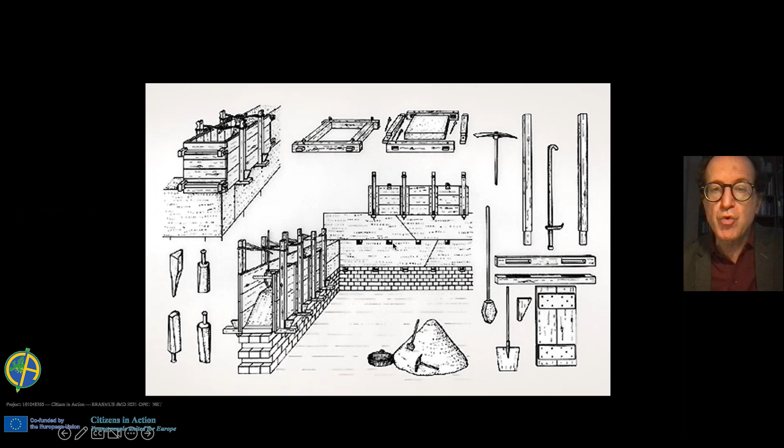These are some tools to understand how this material, which is not really compact and has not a big dimension, should be pressed or worked with specific tools to become useful for construction. And so raw earth provided in history constructions of, in some latitudes, maximum 2 floors, and we can see that the holes represent the way to build them using timber. So a small quantity of timber is complementary to this kind of construction.

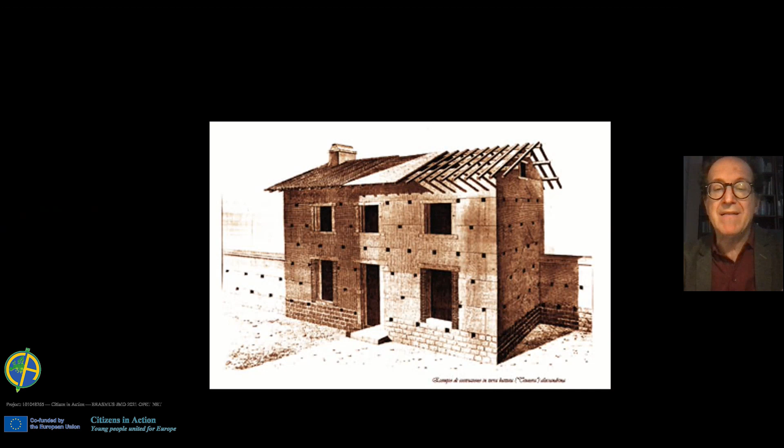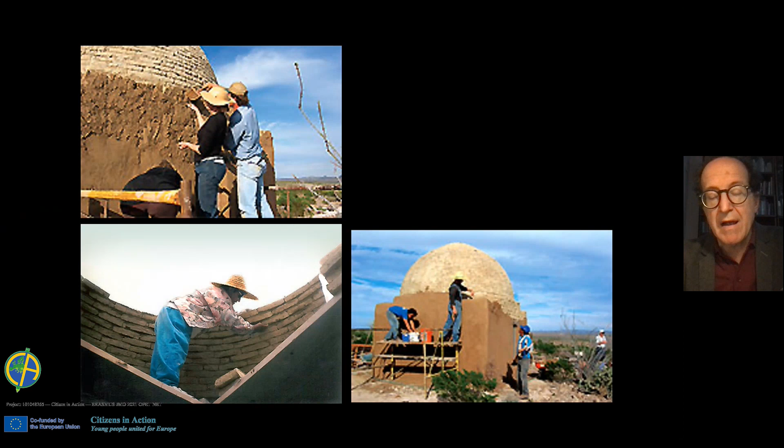So you see, the material is then plastered with the same mud, just to protect the internal structure, and this outside layer should be renewed continuously to keep the inside material protected. We see that the result is very beautiful, very fascinating in this plain vault. These shapes, very simple, are really characteristic of some areas and very beautiful.

So the capacity of improving the material during centuries made some cultures eager to organize something like cathedrals or monumental elements, and you see that the windows, the openings, which are shaped only on the high floors, on the high part of the building, for evident reasons also of defense, will include decorations which became

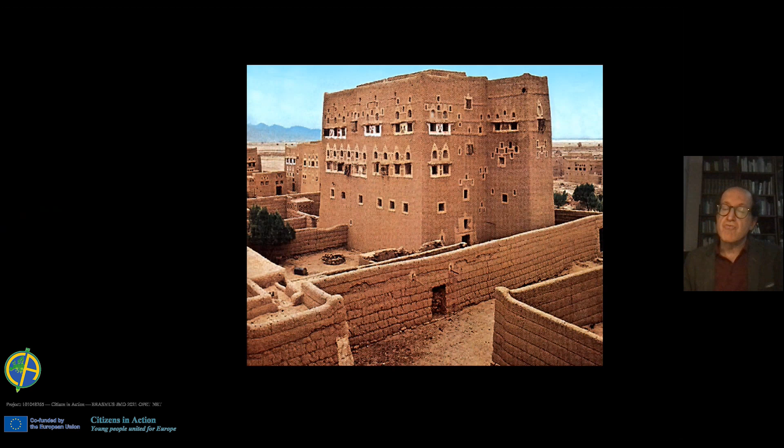symbols of these places. We can also see these are very hot climates, so this raw earth provides a very good climate inside. Also, the small openings tell us that they filter the light and can guarantee a good climate inside. This is the same thing that can explain these small roads with walls on both sides. They provide paths and connections which are not too hot, and they can help to shelter from the sun.

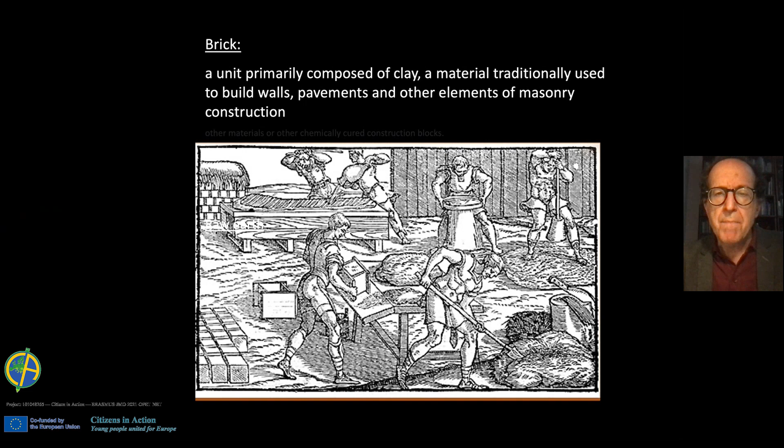Then we have bricks. Bricks are a different thing. A development of raw earth is the capacity of drying this in the sun, or cooking this with developed systems. And so we see also a plate describing how this material is shaped in modules. We see these modules and they become cubic elements, and they were used to build walls, pavements, and all the elements of the masonry construction.

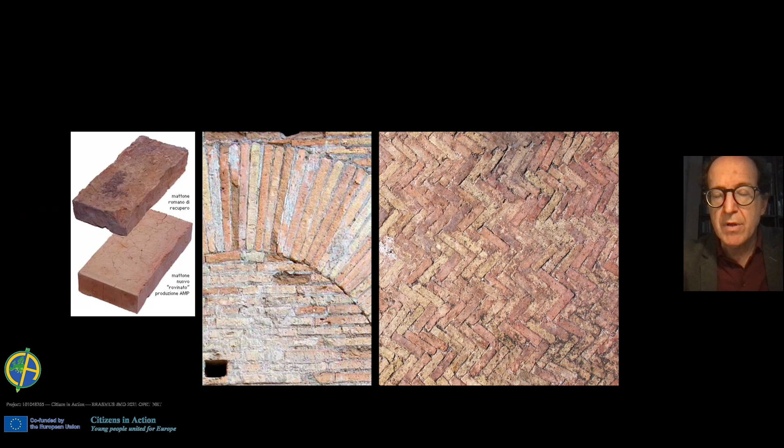In ancient Rome, they were using brick for every detail of the construction, for the masonry, for arches to provide openings. And this was a very successful material, which was also developed into decorations more and more. And so we can see the Roman brick. This is the modular element, which is very light and very easy to be used by one man with one hand. And you see different patterns. These are arches with a special thin material. And then here are pavements in the shape of fish bones.

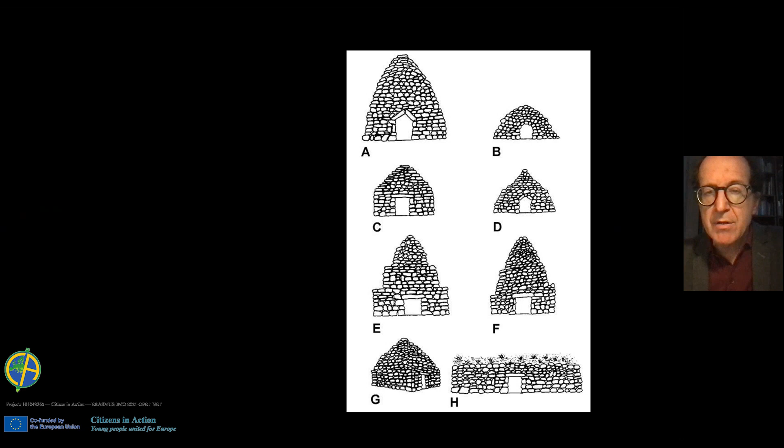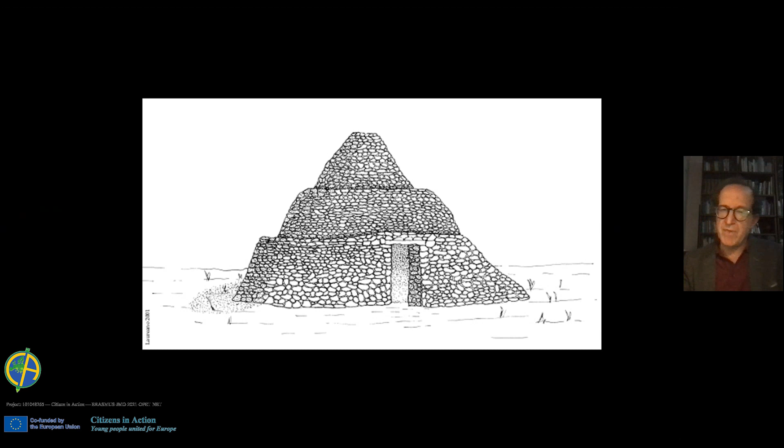One typical primitive use of this material is to provide huts, very simple houses, elements for the countryside. They were used for men and animals in agriculture or in open fields, in many lands, in many latitudes. We can see here possible different schemes according to the findings of these areas. They are the result of a growing capacity of local people to shape and use these materials, and they can become monumental elements. The walls are from 1 to 2 meters thick, so they also provide a very good climate inside. And this is one example in central Italy, which has been restored.

This use of material becomes monumental in some areas, like southern Italy, in Puglia. These trulli are traditional houses. Every conical vault of these countryside farmhouses is a room.

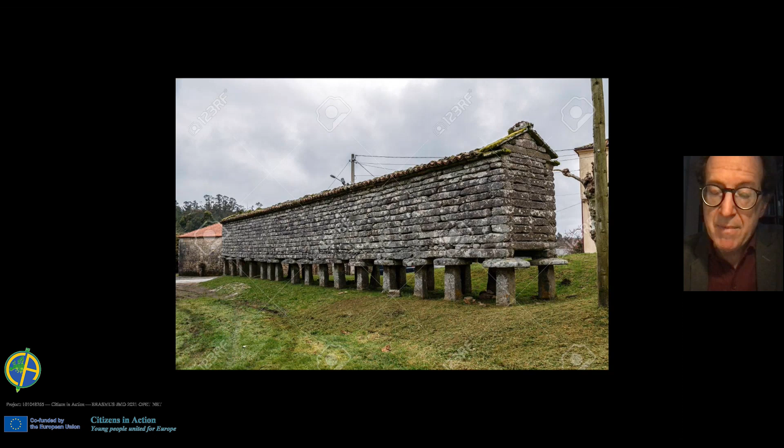So each room has this protection, which is also a monumental image that can be seen from far distance. But the same material is used also in other monumental elements. Traditional barns in northern Spain, in the region of Asturias, in Galicia, became really big monuments. They were very important because they were the places to protect food and also important dresses or costumes for the festivities. They are still today very important protected monuments. You can see how beautiful these elements are, using wood and stone.

What is the use for you of this lecture? It is to understand that landscape can be a wide topic. You can discuss urban landscape, you can discuss open air landscape. And of course, this landscape has different elements, different values. And a value is this one of the materials. So you can also become a bit of an expert on languages at the urban scale and architectural scale.

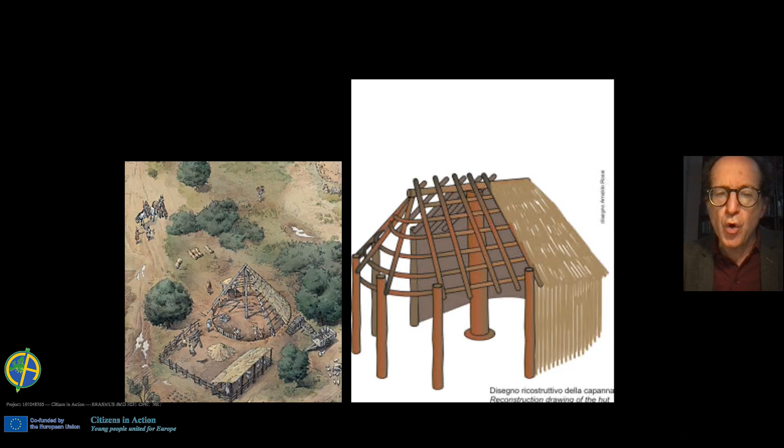This is one example: when you see these straw elements, which are very simple, very thin, they provide just the enclosure, but permit the passage of air. Of course, they are very primitive, very simple, but they start to give a lesson that is transferred century by century, and they become very important again today.

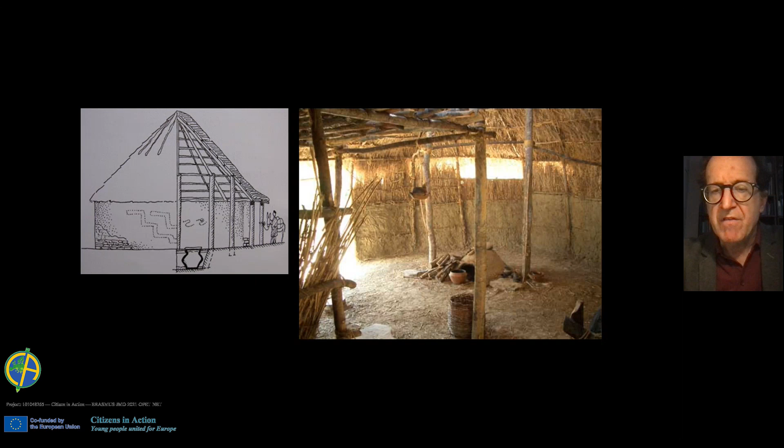Or we see other huts also made with timber structure and raw earth, providing traditional big houses in different latitudes. Here we are in the Alps, for instance, in southern Europe. You can see that different shapes can be used for having these huts with different parts of the trees, with stones in this case to protect also from animals as well.

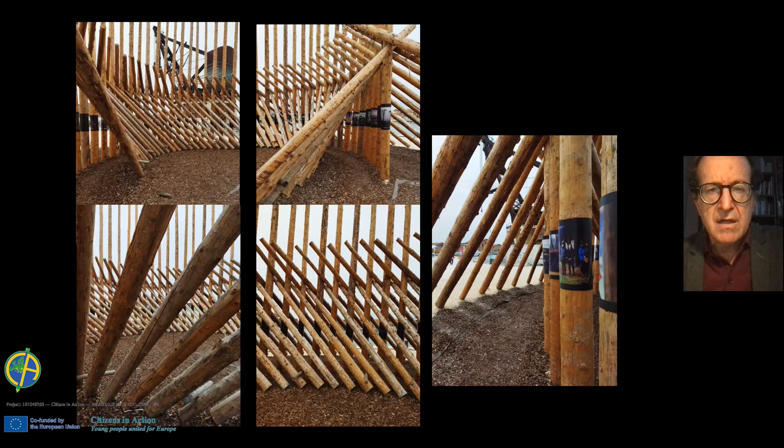You can see that here the connection between these elements becomes really very interesting and provides protected elements inside, also providing some shadow.

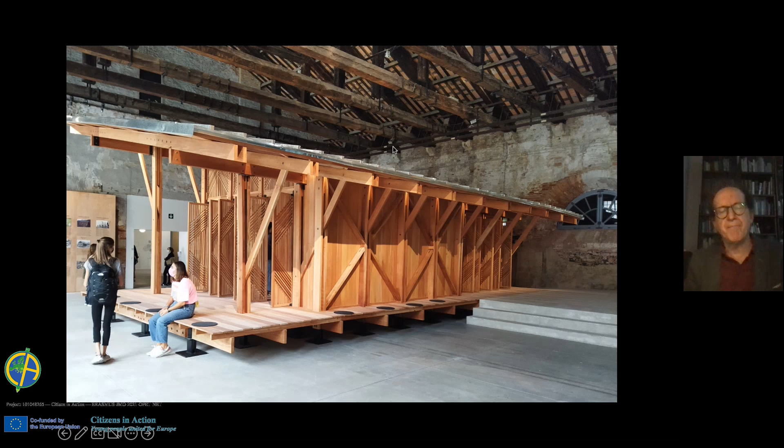This is another interesting example, a library which is available also in Africa - a completely new design which is playing with timber, providing continuity with ancient patterns, and providing completely new elements.

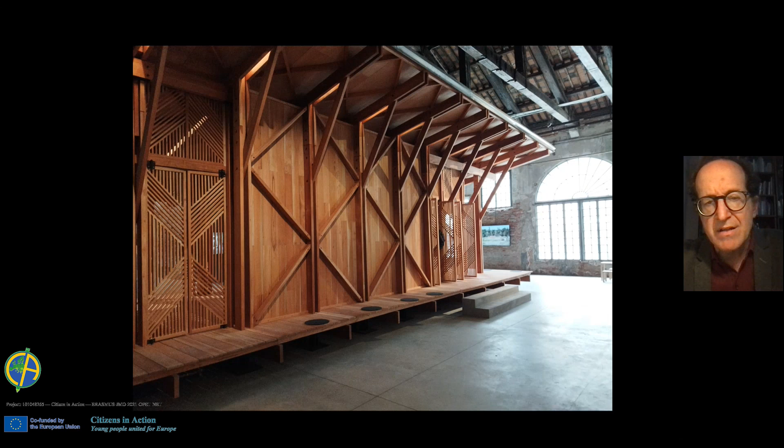I find this rather interesting, and I hope that you too can play a bit with these elements, because now the lecture has ended. I would suggest you, with the help of your teacher, to open your eyes again in a different way.

Try to look and describe the material of your landscape. Is your landscape full of stones, a mountain landscape, or is it a landscape just with sand and earth, or is it a landscape full of forests?

In these different landscapes, you can see how over centuries the landscape has provided the instructions for traditional construction, how the landscape, the ground, the material, the geology of the place has suggested and provided a link with the construction system.

Also search in your dictionary the characters of earth, stone, and timber, because this can help you understand how these three traditional materials can be used also today, with their characters of flexibility, duration, durability, resistance to weight, but also resistance to fire.